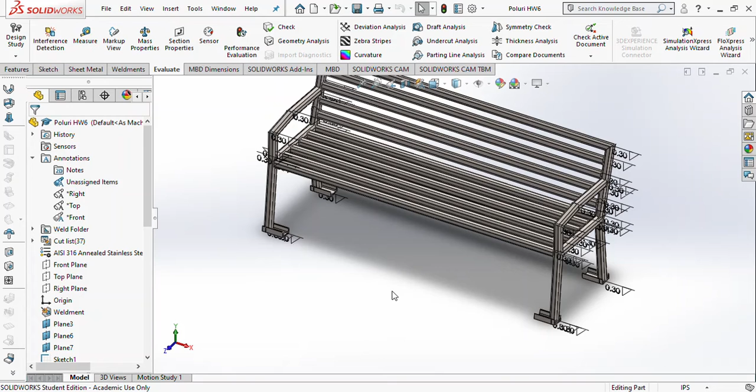Welcome to my SolidWorks bench modeling.

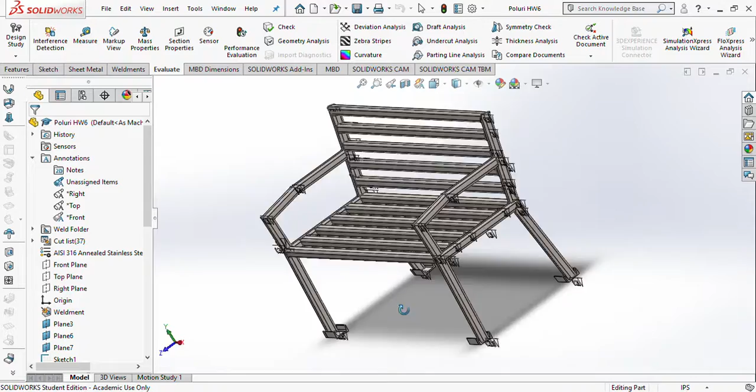This is the bench which I modeled. This is made up of stainless steel bars, and all of the members used in this bench are square members, square structural members, 2 by 2 and 0.05 thickness. That was used because that was the minimum available configuration.

Coming to the length of this bench, this is around 7 feet, which is enough for 3 people to sit on. And coming to the design of this, there are specific gaps involved in these bars. Therefore, dust and debris collection would be minimized.

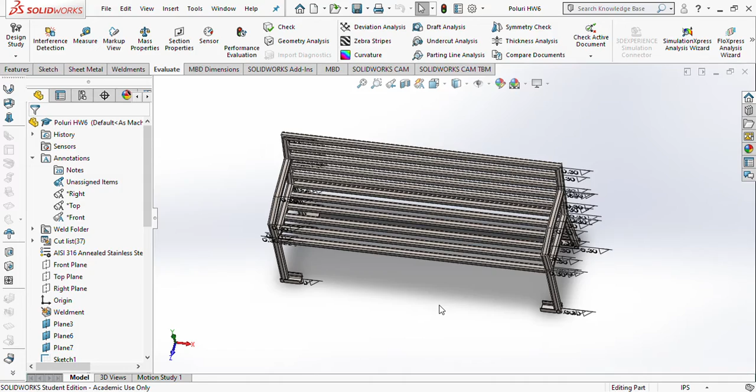And there are not many unique parts in this design as well, because all of the bars are essentially the same. And these sections can be made, and it's just basically identical to this section over here. So the overall number of unique parts is also minimized.

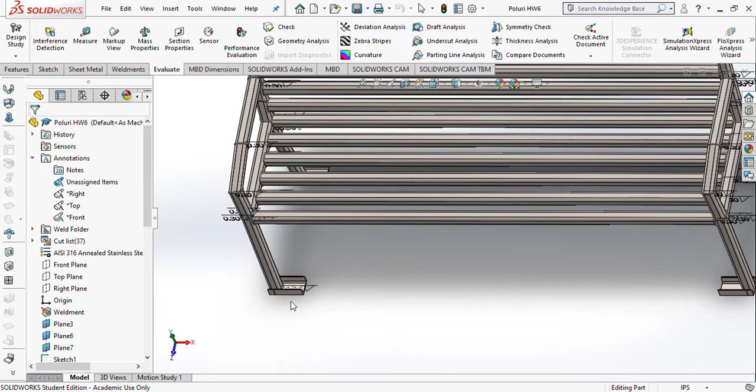And this bench can be bolted or anchored to the ground using these C sections provided at the end of the legs. Instead of bolts, up to here this whole thing can essentially be buried in the ground, which is also enough for the bench to hold on.

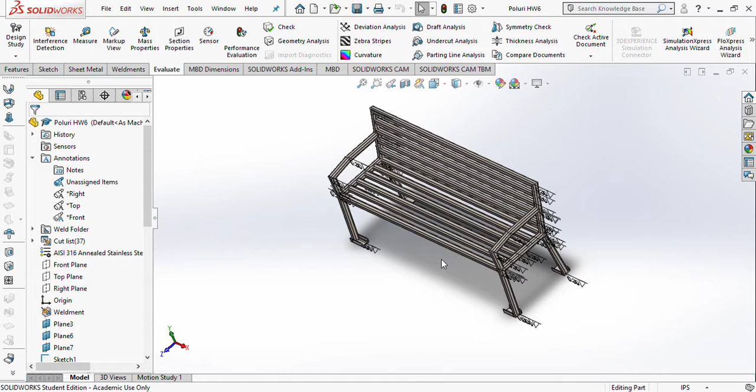Coming to the mass of the bench, because it is stainless steel, the mass of the bench comes around 500 pounds in total. That's a bit heavy, but since the anticipated lifetime is around 10 years, this is a one-time job to just anchor it to the ground.

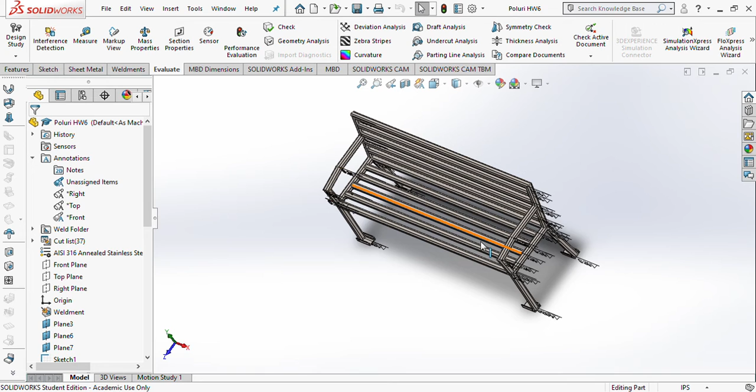And it is said that the bench should support a distributed load of 1000 pounds. So calculating with the max deflection as 0.2, the minimum moment of inertia required for this to survive a distributed load of 1000 pounds, given the length is 84 inches, came around to be 1.35 inch^4.

The minimum moment of inertia to survive a 1000 pound load is 1.35 inch^4. So taking the cross section of the bench here, there are five bars here, 1, 2, 3, 4, 5.

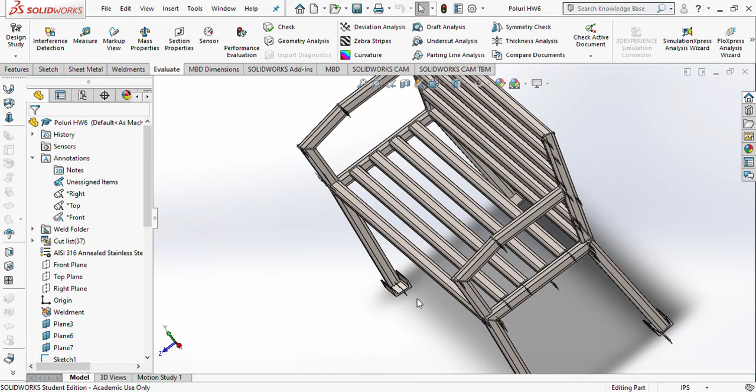So these five bars, calculating the moment of inertia of this, taking the neutral axis in the middle, came around to be around 5 inch^4, which is enough to say that this would survive the given load. It's a bit excessive design, but this was the minimum available thickness of the bars.

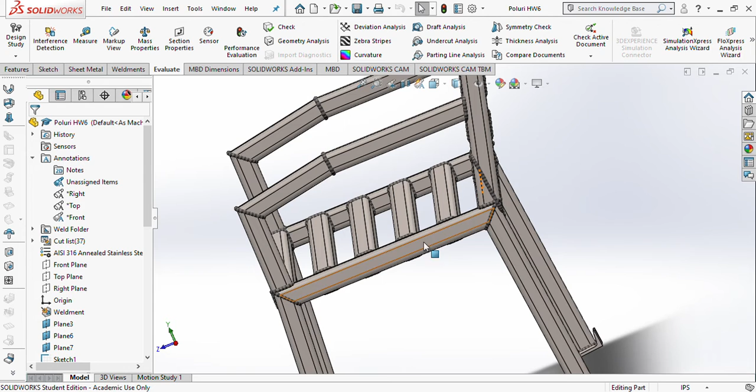And the angle of the backrest provided here is 100 degrees with the base of the bench, so it's enough for human comfort as well.

So there are multiple weldings also required over here. It's basically a complete welding job after the bars are made. The bars can be made, they can be cut, and basically the whole thing is welding.

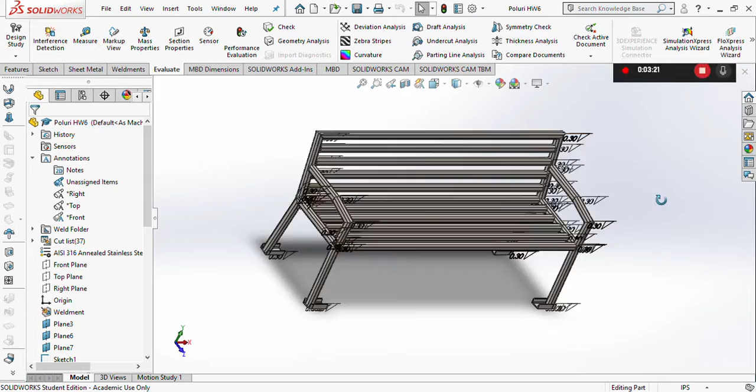So this is my SolidWorks bench model, and thank you very much.